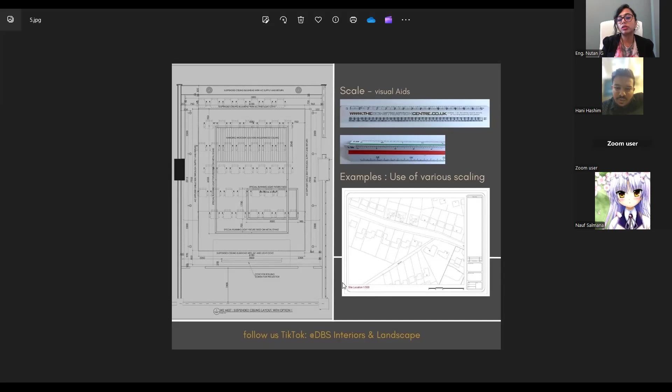And another thing I was talking about is the pencils you are using, because the pencil makes a lot of difference. Our lines speak different things. A thinner line is a construction line, and above that we make it like 0.5mm, 0.2mm thickness, which indicates the different layers of line. A wall line has a different thickness, a construction line has a different thickness.

For the construction line you better go for an HB pencil, which is light but hard, so you will not get a deep impression. Use it with a very light hand just for doing the construction line when you are drawing the basic line. After that, for the final lines, you go with another softer pencil which will give you proper darker lines. So always keep those construction lines, and above that you have your darker final lines.

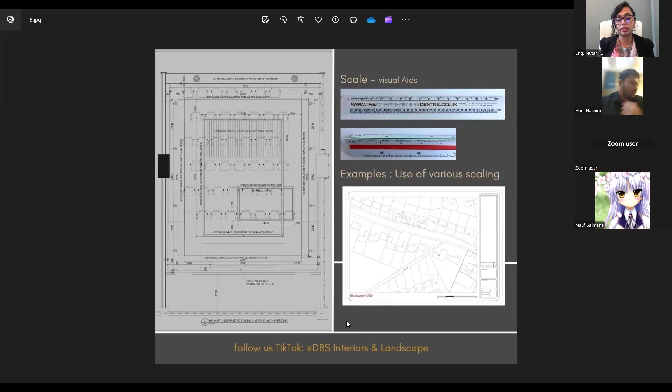Now, what you see here is a 1:500 scale. Let me share another page of it, okay? These are different slides, so let me share with you. Can you see this next slide?

Yes. So now when we see that 500 scale, it was a big plot, a full area, and that county has all the small houses. Now here, at the scale of 1:200, it's just one single site plan where there is one single house. It is increasing - zooming in, like from 500 to 200 is literally you are zooming in.

Now you see here 1:100. So if you see this villa's plan, it is more zoomed in and you can see more details. So when we are drawing our interior design drawings, you will go with all these details.

And then next, can you see this one sheet, this slide? Yes, it's visible. So now here you see the scale is 1:50, which gives more in-depth and more detail. It's more zoomed in.

Here, when we are drafting and doing this work by hand, the scales are literally for zooming in and zooming out, but giving proper measurement, not random measurements. So at 1:50 scale, you are taking it on the side to 1:1. Suppose on your 1:50 it is written as 1 meter or 10 feet, it will correspond on the side with the real measuring tape to 10 feet or 1 meter. That's the reason for these scales - because it's fitting on the paper.

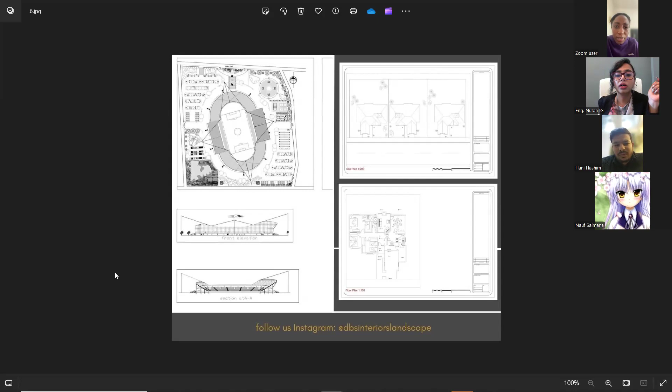For me, on the floor plan with scale 1:100, that's the one I'm seeing. You're saying 1:200. Let me share it again. Okay, one second. Let me share the next slide here. Okay, can you see this one?

Can you see me, or just the screen? No, we can see it. You can see me. So if I show it on the screen here, you can see that. Can you see my book? Yeah, I'll just quickly sketch a few so you can understand what I'm saying.

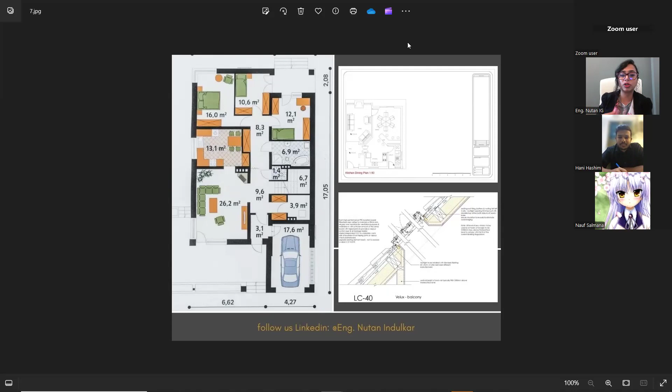Now, have you got what I'm saying? Have you got the points? Do you have any doubt about it? Could you maybe repeat a bit? Oh, pardon. Can you repeat a bit about the area part you were talking about, the area of the room? Okay, see, our drawings are important in such a way.

When they go to 1:500, 1:1000, they can take that whole large area, like a complete county, a complete area of land with lots of housing and lots of buildings together on the paper, so that we can plot them. Now, when you go for 1:200, 500, it becomes like zooming inside, going deeper. So 1:200, 1:300 means you are zooming in, you are getting in.

When we do our interior architectural drawings, we go mostly for 1:50, 1:100, as per the size of our drawing. If it is a full villa, a full office of some square meters, then it can be better to go in 1:100 scale. When we are going for more detail, like a single room you are doing and making its detail, here again, I'll share this one, it is good to go more in depth.

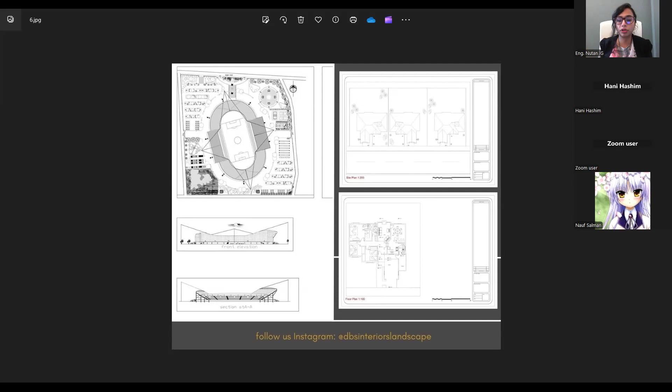Now, can you see this slide? Yes. Which is the whole plan and the detail. So what I was saying, when these measurements and drawings are there, they can be plotted on the site with real measuring tools. If you are doing a survey, you can see those chains, meter tapes, theodolite, all of that used on the site. This drawing is the major key to bring the dreams into reality. And when you see this very detailed thing, those details will not go to the site.

Those details will go to the factories for manufacturing furniture, for manufacturing gypsum ceiling, false ceiling. So those details are like that. Those details go into a smaller scale, like 1:10, 1:2, more in depth. It's called zooming in. So you can see all the detail, what kind of wood will be there, what kind of joint details are there. This you can see is a door detail. So when they are manufacturing the door, fixing the door, that will happen.

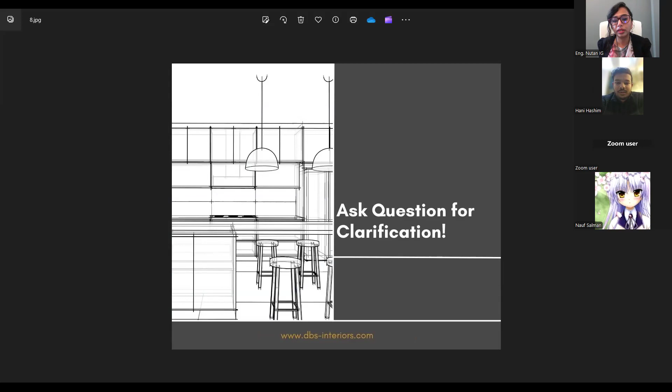So next, because we joined a little bit late, my Zoom is giving me a time limit. Okay, fine. So now let's go quickly to the next slide. We'll just skip this, ask a question. I hope you understand what I'm saying about the scaling and dimensions. Yeah, it's all okay. Yes, yes. Yeah, because we are now on limited time and we already lost some of our time.

So next is use the right tools. What are the right tools? Essential drawing tools and software relevant to engineering drawing. We are drawing by hand, so we need our drafting board, scale, and pencil. Not a clutch pencil, a proper pencil with a sharpened edge. That way it will help, and after that you use a Rotring pen. I know this is going to fall behind.

Now everything is on AutoCAD and SketchUp with line thickness, layer thickness, and line type, which is continuous line, dotted line, all of that. But to get there, basic drawing by hand, practicing by hand, is always the first important stage, an important step. Now, essential drawing tools and software relevant to engineering drawing: AutoCAD, SketchUp, Revit, 3ds Max, Maya, and many more. AutoCAD for us is the most important tool. It's software which lets you make all kinds of drawings.

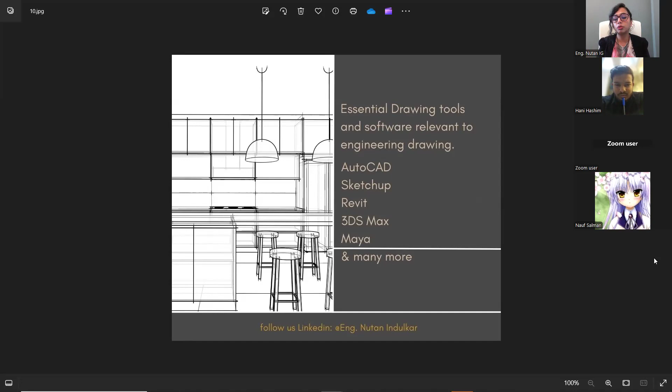In AutoCAD you can go from 2D to 3D. These are all 2D drawings. 2D drawings are the backbone of the whole project, backbone of your design. When you sketch by hand, your idea is on the paper. How to convert that idea from the paper to the computer and to 3D is AutoCAD. It gives all the measurements, heights, everything, and then you can put it in 3D such as SketchUp. You can go with Revit, 3ds Max, Maya for animation and all this. So these are the essential drawing tools.

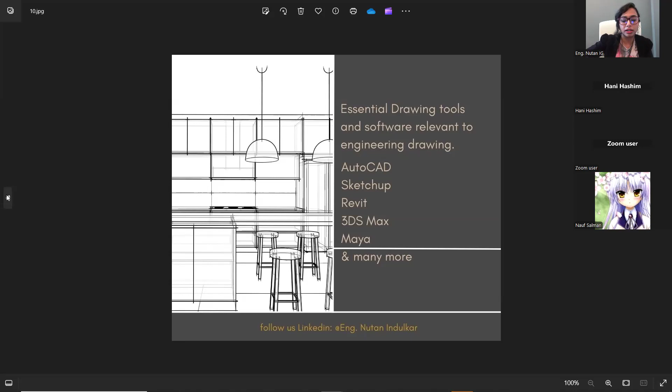Next, some tips to select these tools. You need to learn those softwares: AutoCAD, SketchUp, Revit, all of this. The same way you are now learning how to draw by hand. You need to learn this, use this, and practice, practice, practice. Practice makes perfect. No, practice makes you practice more so that you come to perfection. And actually, there is no perfection. You need to keep iterating, keep developing yourself. So now tip number 3: practice consistently. This is what I just said.

All of you, can you hear me? Because I don't see all of you. Are you there? Yes, yes. Yeah, I can hear you okay.

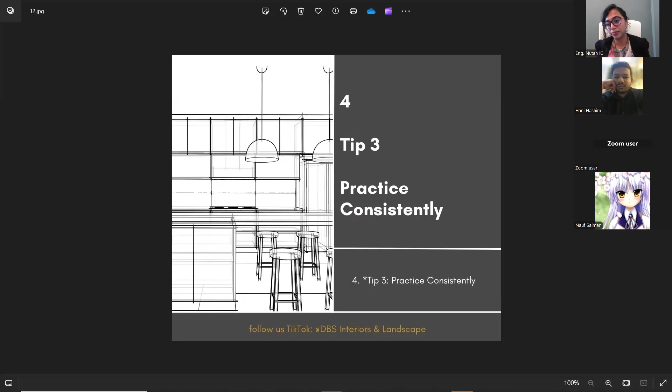So this is another tip: practice consistently without hesitation, because you have taken a profession which is passion, which is art, which is science, and of course engineering. All of this together in this profession, and it's connected to people's daily life. Nobody doesn't want their home or office to be proper, precise, and happy, which we call mindful design, design happiness. So you need to practice, practice, practice. Next, regular practice is important for improving your drawing skills.

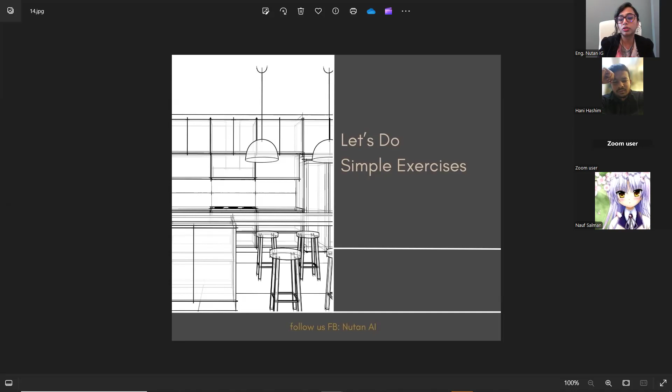But before that, let's see tip number 4: pay attention to detail. The drawing I have shown you on the slide, let me just open that slide again. Can you see this drawing?

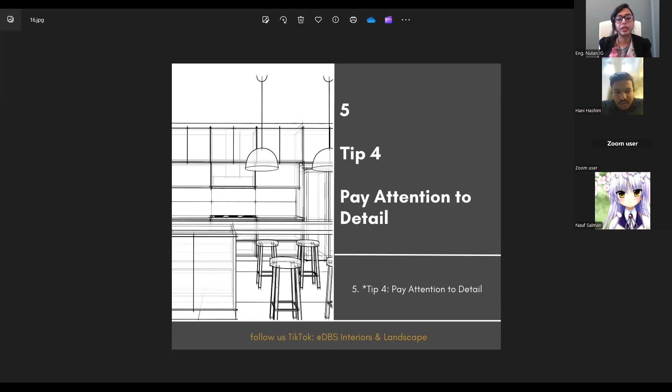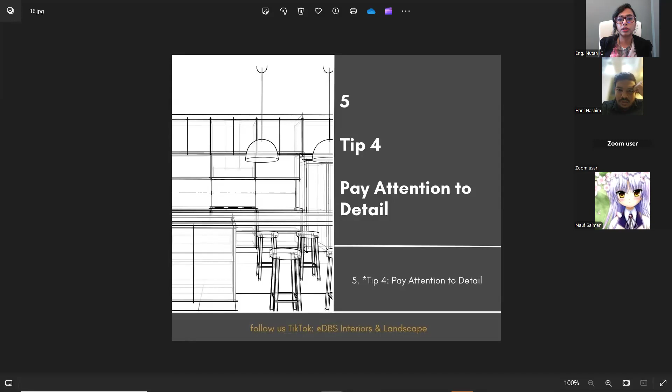It will just give the picture. It is the same as a photograph. You can enhance it by filters and all that. You can add as many details. So that's what we are saying, pay attention to details. Details are very important. Those small details enhance your real work on the site.

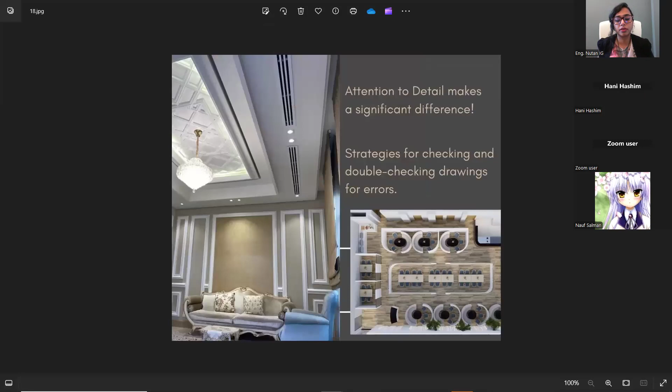It gives a proper, perfect direction, so you won't go wrong anywhere, and you can create the design you are developing for your client, because that's the client's dream. And you carry the language of your drawings to the 3D, to the site. Are you getting me? Yes. Okay, can you see the next slide where I'm talking about the details?

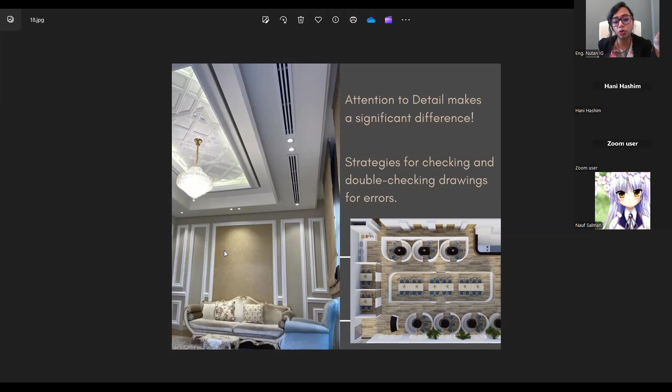You can see these AC grills. Can you see this slide? Yes. You can see this AC grill and the light space, how the lights are placed, and the gypsum ceiling, where you can see the fine lines of it. You can see all the molding on the backside. This all had proper 2D drawings, so the contractor had proper measurements.

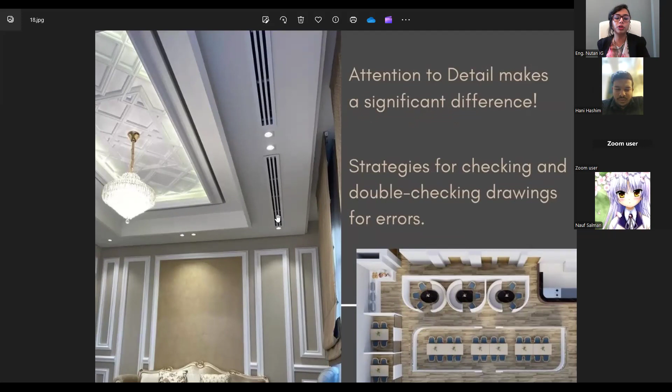You can see how there is a step over there, how this grill is utilized as a beauty of that space. It's not just a mechanical part, where you just need AC, cool air in and out, fresh air. No, it is a part of the whole beautification of the interior design. You can see the shadow gap, how it is used. You can see how the curtains are placed and how the molding is. Can you see this slide?

Yes. Are all those details involved in the drawing? Yes, there are proper details and drawings. That's how it goes to the contractor. Now there are two or three contractors working here, a gypsum contractor who measures everything, fixes all the moldings, and made this gypsum ceiling. You can see how the detail line gives beauty.

The electrician, then the AC people who work with the AC ducting, everybody had this drawing. The electrician knew where to put the spotlights. The AC person knew where the inlet and outlet are, where the cool air will come in and the hot air will go out. All of this is mentioned in the drawing, supporting the contractor. The contractor is in his specialized field, so he's utilizing our drawing as a base.

Now here you see another restaurant layout. Can you see this one and my cursor? Yes. So this is all detailed in the plan, in AutoCAD, measurements, everything is there. Then it's given to the contractor. So these are strategies for checking and double checking drawings for errors. Always check your drawings, because those lines are going to be reality.

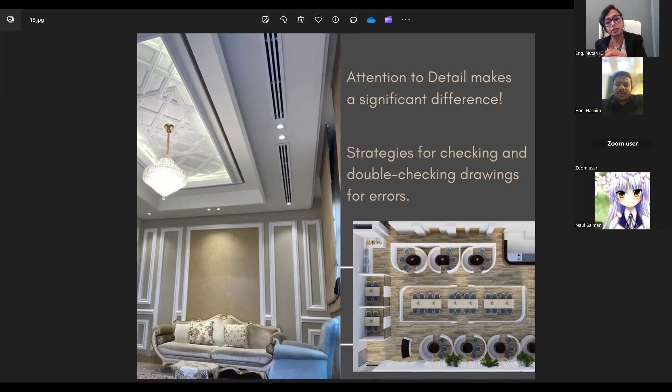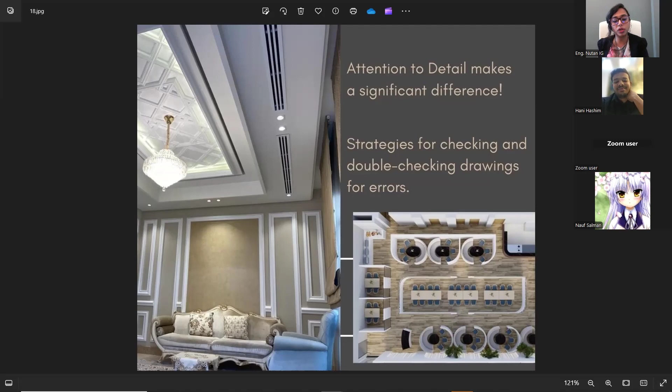I always say to every client and everyone that every single line in the drawing costs a lot to the client and the contractor, because that single line may be 1 meter, 1 centimeter, or 10 meters. So now here, tip number 5: seek feedback and learn from mistakes.

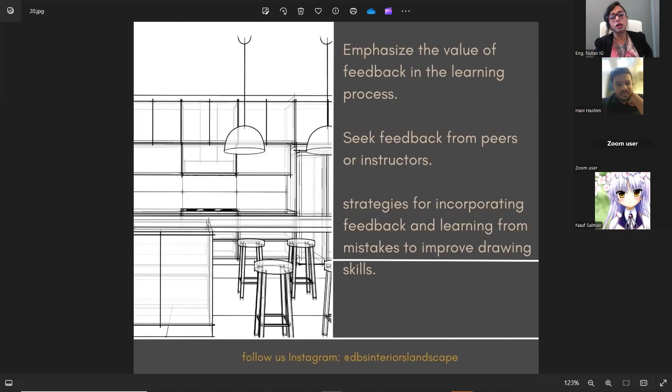Keep practicing, take advice, keep improving, keep searching for how you can learn more, and seek feedback from your peers and instructor. Strategies for incorporating feedback and learning from mistakes to improve drawing skills are always important. We are short of time, otherwise I wanted to show you how to sketch a very simple drawing, but we can do that next time.

So, do you have any questions? We have just 1 minute remaining. I have a question about those details. Please. Do you draw them by hand, or do you use 3D animation?